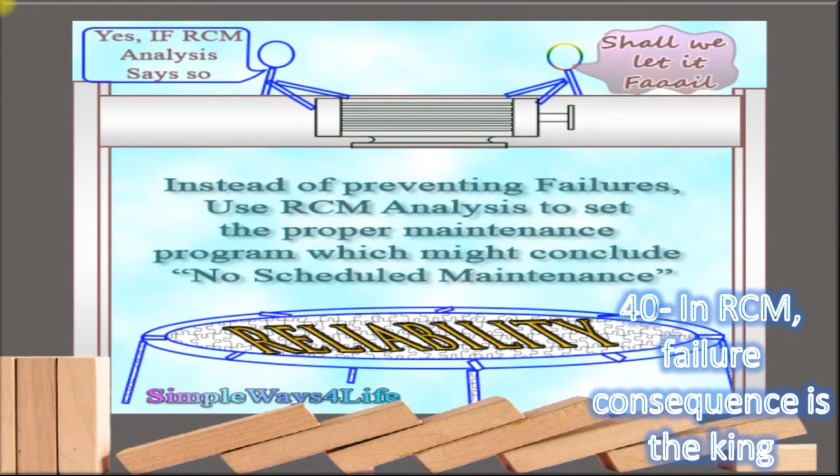To continue our journey in preparation of applying reliability-centered maintenance methodology and selecting our maintenance tasks, as we had explained in the previous two videos, we need to understand why RCM is not focusing on failure prevention. So why is failure prevention not the main focus while we are preparing our reliability-centered maintenance?

Even for some conditions, it allows equipment to fail, and you can simply say there are no planned maintenance activities, no visible maintenance activities, no scheduled maintenance activities that we can do, and we will let this equipment fail. This way of thinking is not common when we are setting up our maintenance, because usually we are used to preventing failure. We usually have the perception, which is wrong, that the main task of the maintenance team is to prevent the failure.

That's a perception, but actually reliability-centered maintenance focuses on the consequences of the failures, based on studies done mainly by the aviation and naval industries, where losses from maintenance problems are huge, including lives and equipment worth millions, and some disasters in world history. They found that maybe between 11 to 20% of the failures are related to age, and most of the failure prevention mechanisms we are using target aging. It's based on time, not on anything else.

So they found that it's nonsense to do all these maintenance activities when the failure still happens. That's a big problem. If I do a lot of expensive maintenance activities, and at the end of the day failure happens randomly, I cannot correlate the maintenance activity I'm doing with the failure that happens. That's a main focus in reliability-centered maintenance. Reliability-centered maintenance focuses on the consequence of the failure. What happens due to this failure?

If we try to minimize the consequence of the failure, we can let the failure happen and take its time, and if the consequences on production, operations, the environment, risk, and safety are minimal, negligible, or don't exist, you can let it fail normally. First of all, we need to focus on our perception of failure prevention. Failure prevention usually means that we do some restoration action before the failure occurs.

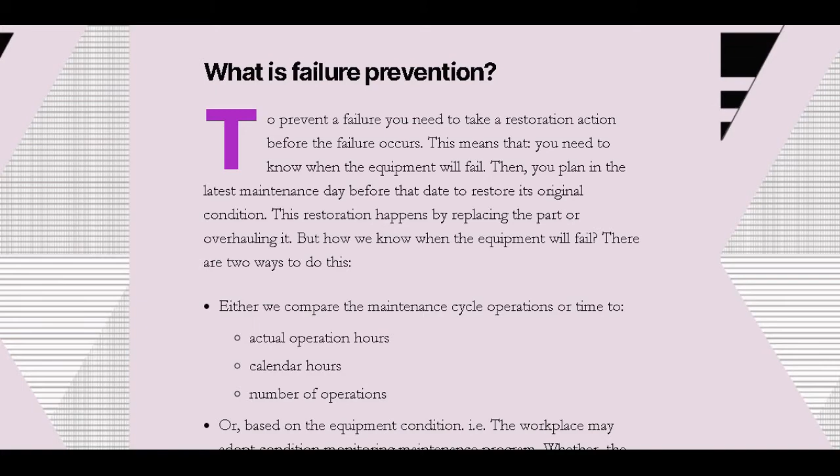On the other hand, we rely on the equipment condition, but this depends on whether the workplace adopts condition-based maintenance. We can measure the time till failure using vibration measurement, ultrasound measurement, or whatever analysis we do, and know that this equipment is about to fail. When it is approaching failure, at 70% or 80% of the condition, whatever methodology we adopted for the condition monitoring system, we do the maintenance before, or we plan directly for the next stoppage, stop the equipment and do it.

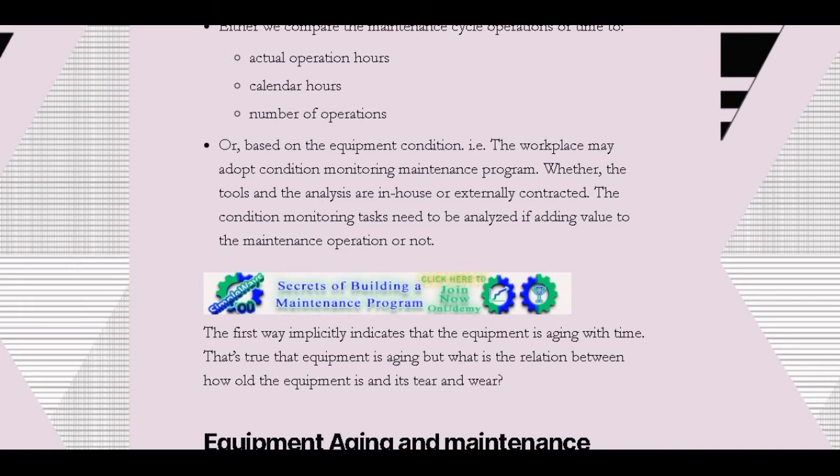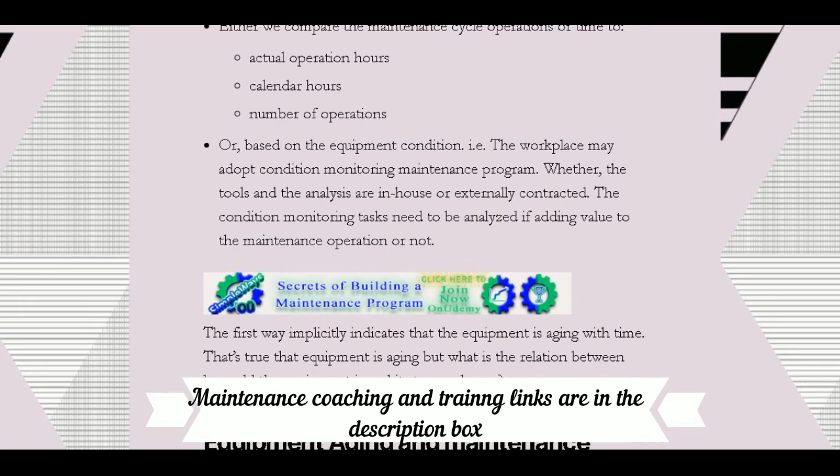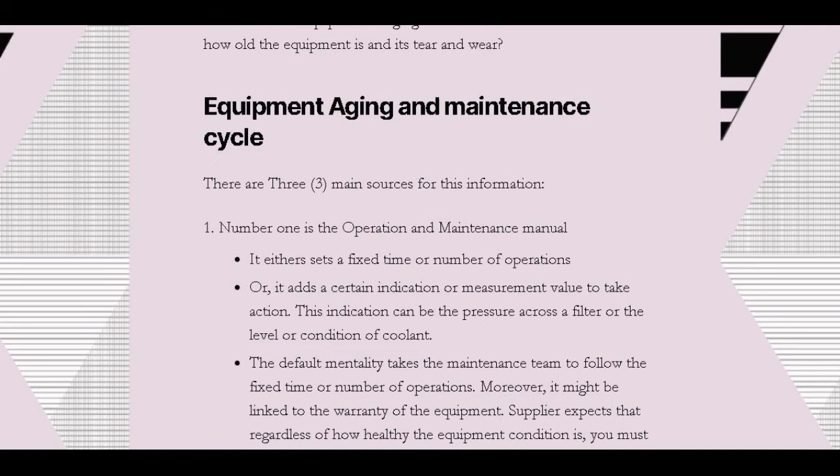Okay, so the other hand is to relate the equipment aging and the maintenance cycle. As we said, the aviation industry studied this thoroughly, and they found that there is no correlation except between 11 and 23%, 11% in the aviation industry and 23% in the naval industry. That's the correlation between equipment aging and a failure that happens. The others are random occurrences of failures.

Okay, so the main three sources where we get some correlation between aging and maintenance cycles are, first, the operation and maintenance manual, where usually there's a fixed time for operation or some indication. For example, the pressure across the filter increased, or the coolant condition changed, so we analyze the coolant or check its level, and then take some maintenance action. But still, it's based on time. So even if after 6 months this didn't happen, you just need to change the coolant or the lubricant or whatever.

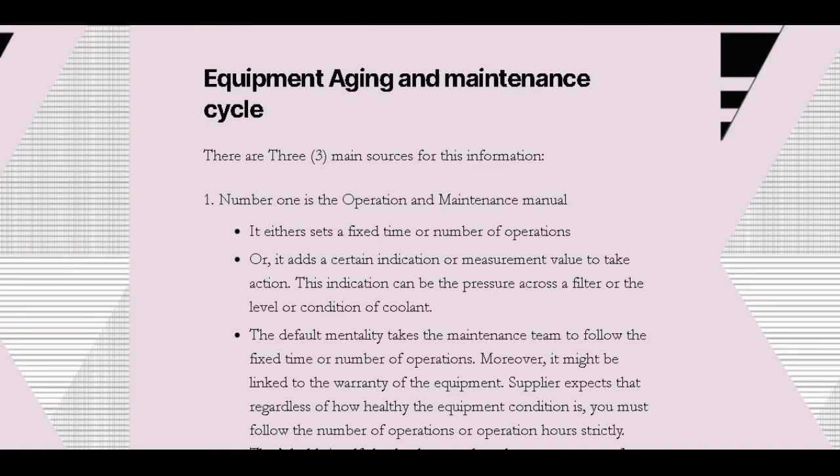Also, the default mentality of the maintenance team usually likes to follow this because it's easier to follow an instruction telling you, based on time, do this and that, and don't chase or analyze. It's easier. But on the other side, in some regulatory environments of maintenance, you need to apply strict time-based maintenance or number-of-operations maintenance, or strict inspection and analysis, to reach when you will do this maintenance. This all depends on the consequence of the failure.

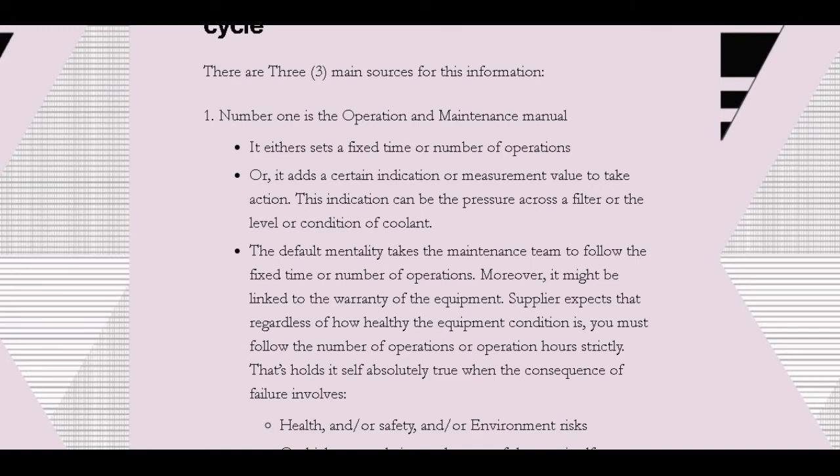So this regulation came from the consequence of the failure. If it is related to fatality, to health, safety and environment, or a high cost from the failure, then you need to strictly follow the timing. But actually this is not the case, because in many conditions it's not regulatory, but we change parts that we don't need to change and still the failure happens.

Also, the manuals from the operators, after we inspected them and used their timing. Then comes the maintenance team experience from other work locations or from nearby companies or workplaces, and also the workplace experience which builds up with time. Those are the sources where we correlate the maintenance cycle and the aging of the equipment. Actually, they are not correlated, but we try to make some correlation between them.

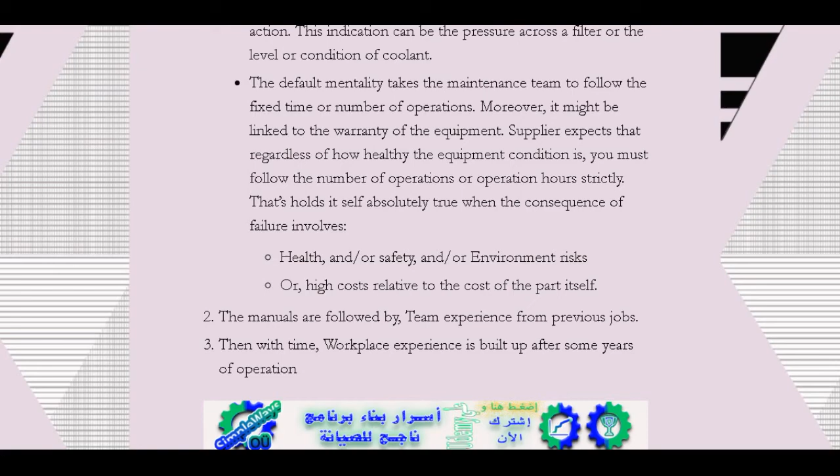So usually aging is not the magic answer, as we said about the aviation industry, because reliability-centered maintenance had already been standardized from the aviation industry. The reference is SAE JA1011. That's the standard of the reliability-centered maintenance methodology of analysis, created after a huge analysis from the aviation industry. And mainly it focuses on the consequences of the failure.

You need to consider this failure, or even partial failure, of a high value, so that we take action in case it has a high consequence. And then this consequence I need to compare to the maintenance cost. This comparison will tell you whether it's feasible to do this maintenance or it's nonsense to do this maintenance.

There's a very important note here at the end of this talk: please don't add a maintenance activity just because you need to close the record. Some failure happened, then we need to take an action based on this failure. So we will add some maintenance task, we will reduce a maintenance task, we will add some inspection point and so on.

Regardless of analyzing whether this will add value to prevent the consequence of the failure, or to prevent the stimulated effect or the external environmental factors that stimulate or motivate these failures. So it needs to be analyzed first, not an action added to the report and then close the report. Because on the next failure report, you will do the same. On the third failure report, you will do the same, and so on.

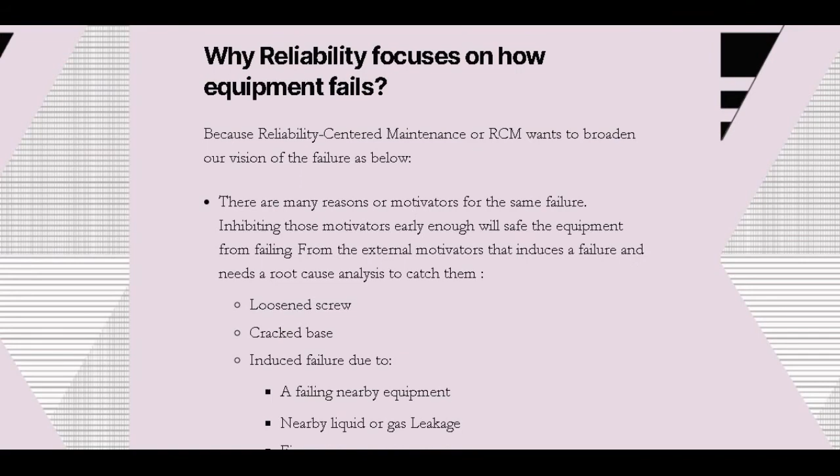So that's an action to prevent the motivator for the failure. It's not cleaning the cards, it's preventing the dust from reaching the cards itself. So we need to focus on these motivators. Maybe a loose screw, a cracked base, induced failure from a nearby failing equipment, leakage of air, liquid or gas, some human mistakes and so on. We'll study all of this on our journey to prepare for reliability-centered maintenance. You can make a shortcut by joining our trainings.

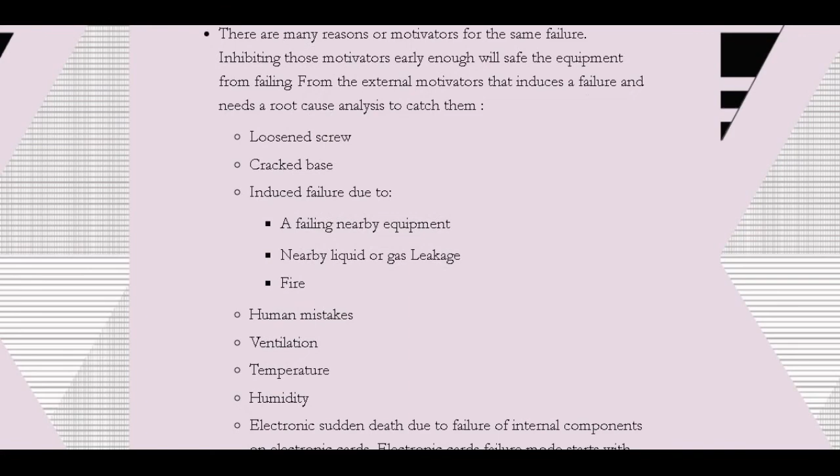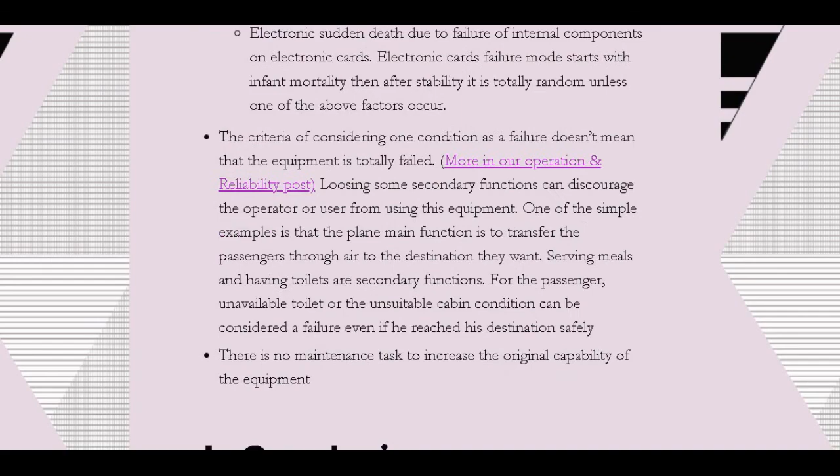So all of this helps us to change our mentality regarding equipment failure consequences, and why reliability-centered maintenance focuses on the consequence rather than on the failure itself. In conclusion, we need to understand that adding a new maintenance task is not the solution to our maintenance problems.